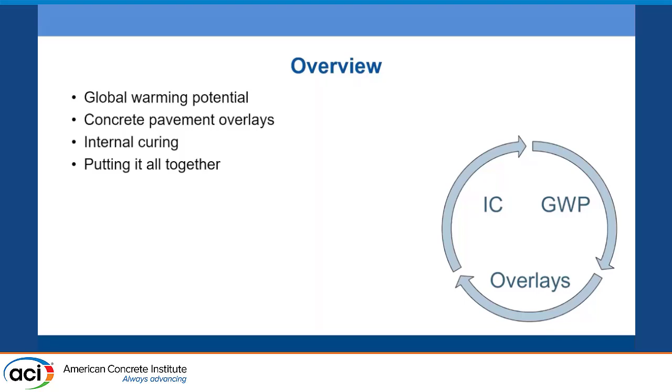With respect to global warming potential, it's been a common theme for concrete and all types of infrastructure in recent years that we're recognizing the impacts of climate change, the need to reduce future CO2 emissions, and that cement is a fairly significant contributor to those emissions. So we want to seek to reduce embodied carbon emissions of concrete, but obviously without compromising the quality or performance of the infrastructure.

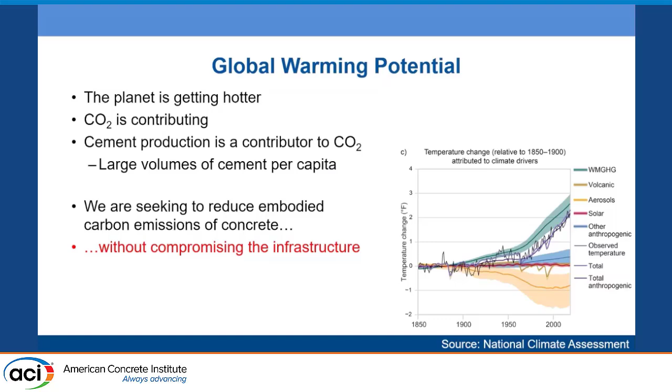In fact, designing our infrastructure to be longer lasting is a good way to reduce the life cycle emissions of our infrastructure, a common theme we've already touched on in this session. In all different sectors and types of concrete buildings, structures, and transportation infrastructure, we talk a lot about embodied carbon emissions.

In a pavements context, if we can find ways to reduce the amount of concrete we need through optimizing design, potentially use less binder in the concrete mix, or have a binder containing less Portland cement clinker, these are all good ways to reduce embodied carbon emissions.

But we do want to make sure we're thinking life cycle as well. From a maintenance and rehabilitation point of view, if we can build a pavement that requires less future work, so we don't have to use as many new raw materials to keep it in good condition over its entire service life, that can obviously be helpful.

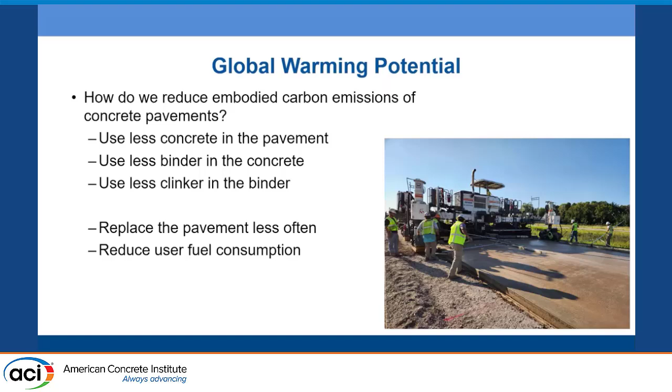One thing that's pavement specific but can be really significant is that pavements have quite a bit of influence over the fuel consumption of vehicles traveling over them. The surface characteristics of a pavement, chiefly its roughness and also the amount of deflection the pavement experiences as a traffic load travels over it, can end up having a pretty significant influence on the amount of fuel a vehicle needs to use to continue operating at its particular speed.

So beyond just thinking life cycle and reducing future maintenance costs, if we can keep our pavements in good condition for the long term, and particularly help ensure they remain smooth over the long term, that can end up having quite a bit of impact on the overall life cycle global warming potential we can measure, model, or calculate for our pavement system. So it's a pretty significant area of interest right now within the pavement community.

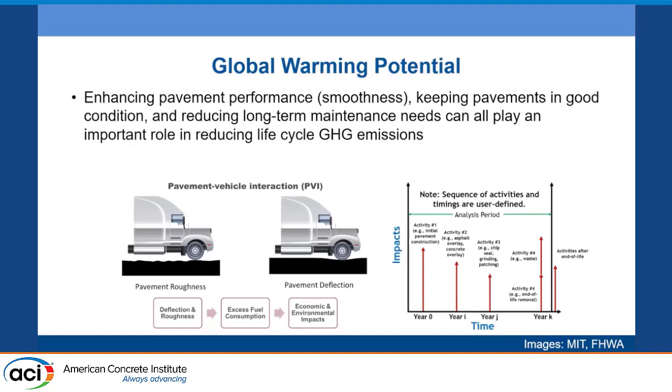To talk about concrete pavement overlays, if you're not familiar: very simply, it's a maintenance, rehabilitation, or preservation method, however you want to consider it, to extend the life of an existing pavement with an overlay of a new concrete surface. It can be applied to any type of existing pavement, whether it's an existing concrete or asphalt surface.

You can see here, in this example picture, we're overlaying an existing asphalt pavement. It's been profile milled, but then we're just coming in with a slip form paving machine without doing any other type of surface prep, and paving a new concrete overlay right on top.

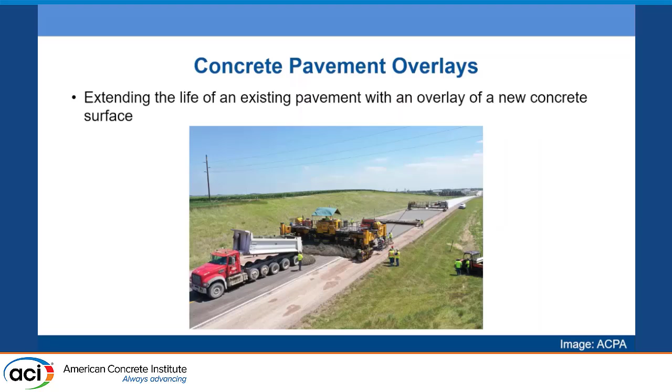Concrete overlays have the potential for a lot of long-term benefits, both in terms of life cycle cost, as well as life cycle carbon emissions. We have the ability to upgrade an existing distressed pavement, putting it into better condition, better able to allow traffic loads to travel over it without experiencing as much roughness or deflection. We're able to use equity and resources invested in the original pavement.

Generally, concrete overlays are not as thick as a conventional pavement because they do have some underlying pavement structure that they're able to rely on for load carrying capacity. Compared to new construction, it reduces the amount of time and energy needed for the construction process. And because they're not as thick as conventional pavements, we're using less raw materials.

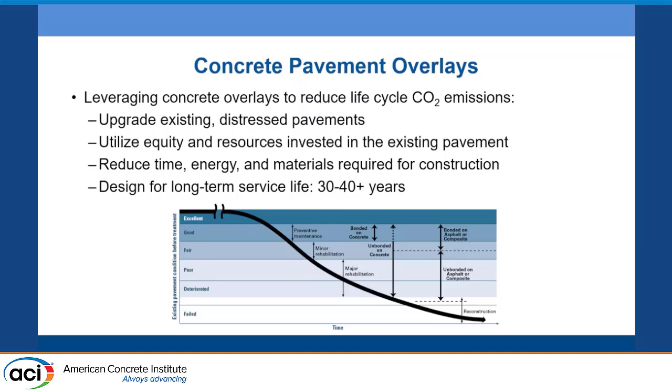If you compare concrete overlays to other types of pavement rehabilitation, whether very thin surface treatments or conventional thickness asphalt overlays, one additional benefit is that concrete overlays can be designed to achieve very long-term service life, on the order of 30 or 40 years. Being able to build something once and keep it in good condition could have long-term benefits from an environmental point of view relative to other pavement rehabilitation techniques.

And now we get to curing. Our typical conventional curing process for concrete pavements is to use a white pigmented curing compound that we apply to the surface and the sides of the slab. Just like bridge decks, concrete pavements are exposed to the elements. It's a very harsh environment.

We're going to be placing de-icing chemicals on the concrete pavement. So anything we can do to keep as much water in the system during hydration to promote good curing, and in particular to make sure the surface doesn't dry out and we don't end up with a weak surface susceptible to scaling or future joint deterioration issues, is important. Curing is a really critical part of the construction process for concrete pavements, and it's critical to getting the longevity and durability we're looking for.

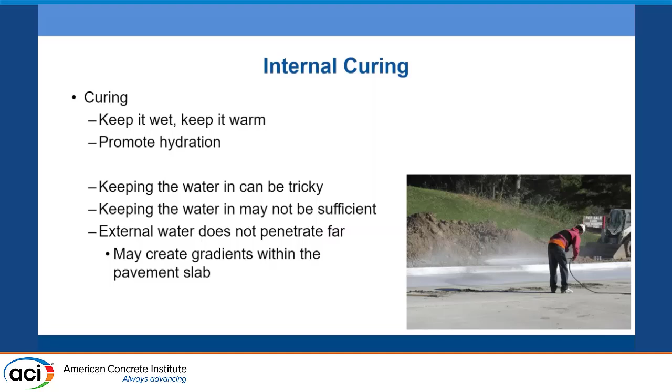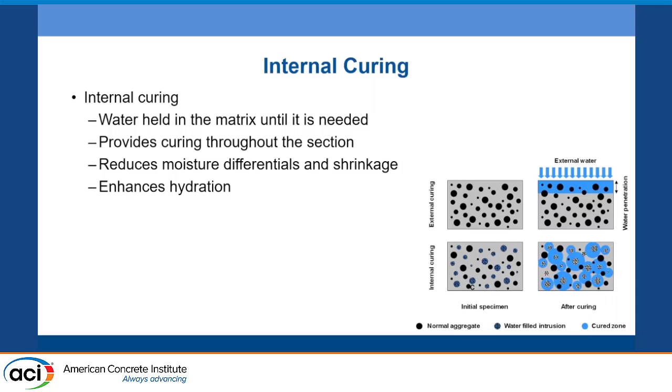Internal curing can obviously have a lot of benefits to all types of concrete structures, as we've been talking about this morning. But some key things we're interested in from a pavement's point of view, in addition to enhanced hydration and enhanced properties, are the ability to reduce the moisture differentials that develop as concrete is setting, and to reduce shrinkage. Those could have a number of different benefits for concrete pavements.

Particularly when we look at concrete overlays, these are thinner than conventional full-depth concrete pavement slabs, usually on the order of a couple of inches, the way most projects are designed and built—at least I can speak to the Midwest. So we have a situation where more surface area of our concrete slab is exposed relative to the volume of concrete in the overlay system, compared to a thicker pavement. So curing is even more critical to ensure good performance out of our concrete overlays.

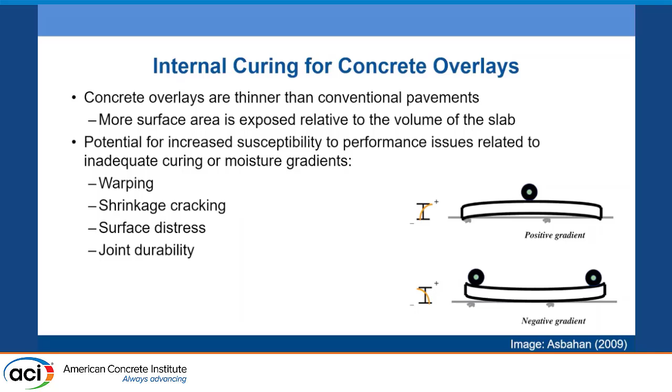Warping can also induce additional stresses and potentially reduce the fatigue life of the slab if there's a significant amount of warping. The temperature gradient plays a role in this as well, and sometimes they're lumped together—you'll see curling and warping used interchangeably. But the moisture gradient plays a significant role in that process, in addition to the potential for shrinkage cracking, especially in dry conditions if the pavement isn't well cured, and susceptibility to other surface distress and joint deterioration related issues.

Looking at the set of things we're particularly concerned with regarding curing, that's where internal curing jumps out as being useful—not just for pavements in general, but particularly for concrete overlays, where because of the thinner nature of this pavement system, it might play a larger role or give us a greater benefit, reducing the probability of having these potential problems.

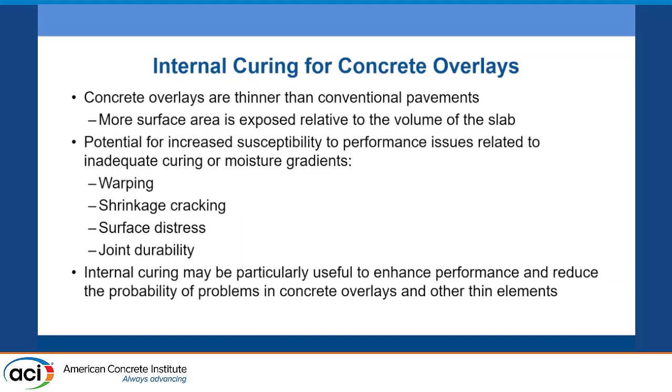Jumping now to the project that was built, this was on a county highway in Washington County, Iowa. This was a 6-inch thick concrete overlay. The terminology you see there, COCU, that's concrete on concrete unbonded overlay. So the existing pavement was a concrete pavement. You can actually see here, though, they're paving on asphalt because they're using an asphalt separation layer to relieve stresses, preventing reflective cracking from the joints in the underlying concrete pavement into the overlay.

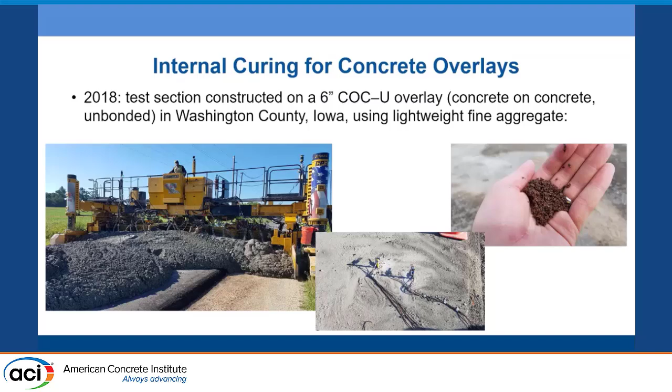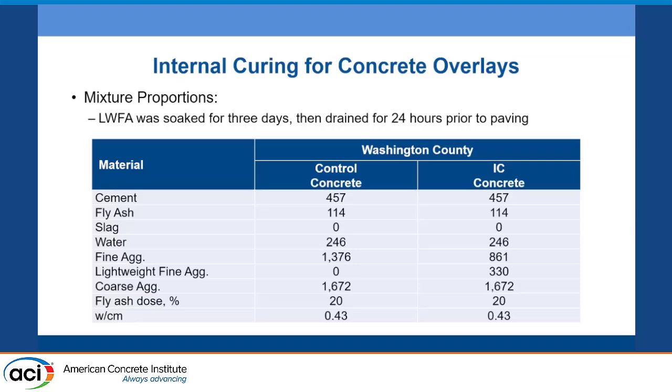So just some notes from the construction. Everything went very smoothly out on the grade. The test section here, it wasn't the entire project that was paved this way - it was a test section that was, I think, about 500 feet long. So you have a lot of control, and we were able to instrument the control section alongside this internally cured section. The contractor set up a central batch plant for this project, so they were running their own plant. They didn't note any issues soaking or draining the stockpile of the lightweight fine aggregate. It was soaked for 3 days and then drained for 24 hours prior to construction. Obviously the quantities, since they were only paving for 500 feet, were fairly limited, but they didn't perceive any major logistical issues with that.

The lightweight fine aggregate was batched assuming saturated surface dry. Overall, all the operations at the plant went well. Out on the grade, the finishing crew didn't really observe any differences between the control mix and the internally cured mix. They did notice, actually, that the mix maybe looked a little bit wet, and maybe some cream was vibrating to the top of the concrete in the grout box right in front of the paving machine. But they also observed that on the same day when they paved the control section, so it may have just been particularly how they had the mix dialed in on that particular day of paving.

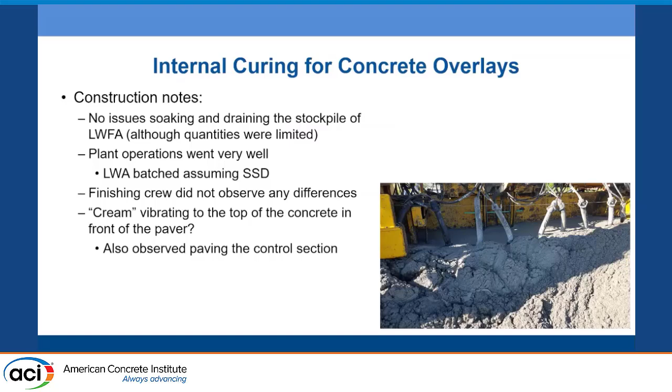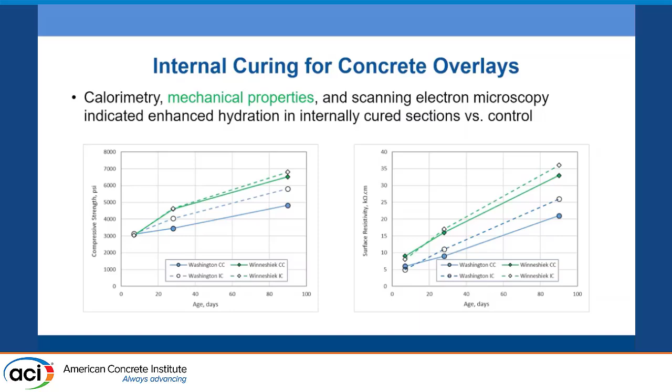Same story, the plot on the right there is surface resistivity, so testing cylinders to infer permeability and long-term durability. Again, the internal curing sections were able to achieve greater surface resistivity values. And then finally they did take some samples, look at them under the scanning electron microscope, and noticed that it appeared there were fewer unreacted cement particles remaining. They did tests at 7 days, 28 days, and 90 days, and at each step in the process it looks like the sections with the lightweight fine aggregate were all able to achieve greater amounts of hydration than sections without.

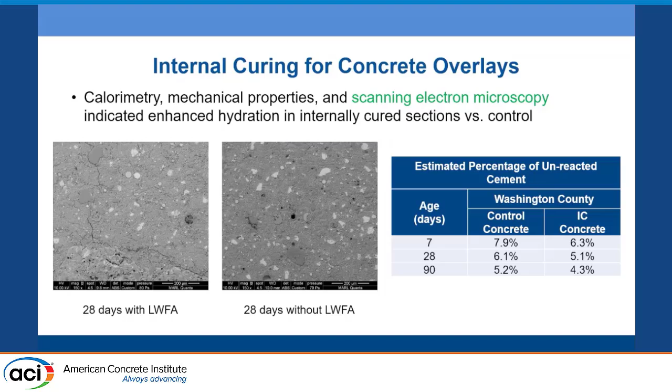So in general, a lot of these benefits or properties of using lightweight fine aggregate that we've seen cited, we've seen evidence of in these sections here when we look at them compared to the control. And then finally, the last one that's pretty interesting here - the team did LiDAR testing to look at the shape of these concrete slabs out in the field for about a year after they were initially constructed. What they found was that the internal curing test section appeared to demonstrate a reduced moisture gradient, both initially after construction and when they visited in spring, summer, fall, and winter over the following year.

The gradients they measured through instrumenting the slab appeared to be less in the internal curing test sections. And with the LiDAR measurements, they also noticed that did in fact correspond to less overall shape change in the slab. It appeared to have not as much of a built-in curling or warping profile, and it didn't experience as much movement between measurements taken at different times of year and day, relative to the control section.

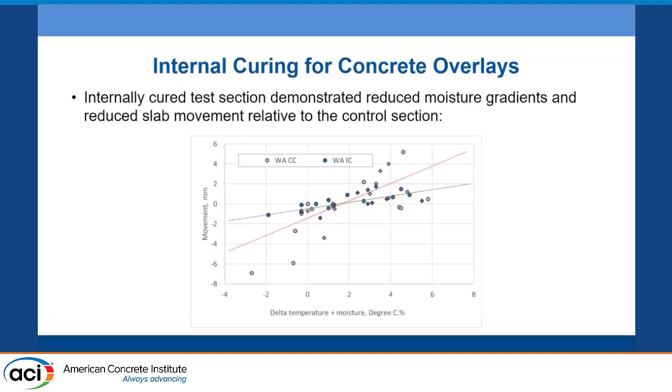This is interesting to look at because most pavements have a built-in gradient that's a curled up shape. Looking at these projects, reviewing the report and the measurements taken at different times of year, it appears the control section actually had a built-in curled down shape, mostly curled down, which is interesting. We've seen projects like this before, it's just not the typical behavior for concrete pavement slabs. But again, the internal curing did not have as much of a gradient as the control section, so it generally had a flatter profile, and you would expect in the future that it would also be a smoother pavement.

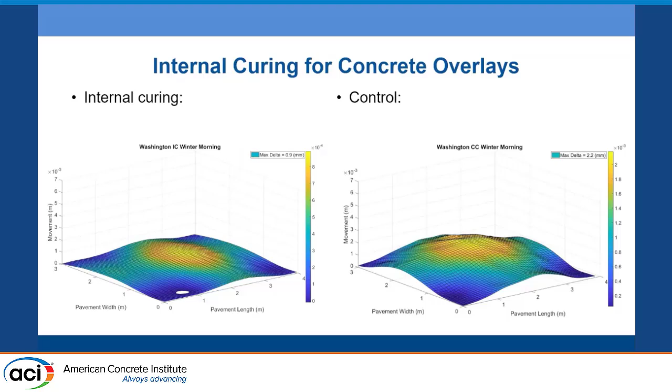That's where we can start connecting the benefits of internal curing to global warming potential. So putting everything together, if we're able to realize benefits of internal curing such as reduced warping, which can reduce the stresses experienced in the pavement slab under traffic and increase smoothness, that can have a number of benefits to the overall life cycle emissions associated with the pavement. Longer lasting, more durable, less future maintenance, but also reducing fuel usage during the use stage of the life cycle assessment from vehicles traveling on the pavement, because we have a smoother surface and don't have to expend as much energy to travel over it.

Some of the other things we're hoping to design for durability could also involve using less binder in the concrete, and that plays in pretty well with the benefits of internal curing. Some of the other things we're looking to achieve with concrete overlays, if we're able to reduce warping, maybe that allows us to optimize our concrete overlay designs to some extent, and maybe that would allow us to potentially reduce the thickness of our overlay design. The other benefits we're looking to achieve with concrete overlays in the first place can certainly help play into global warming potential.

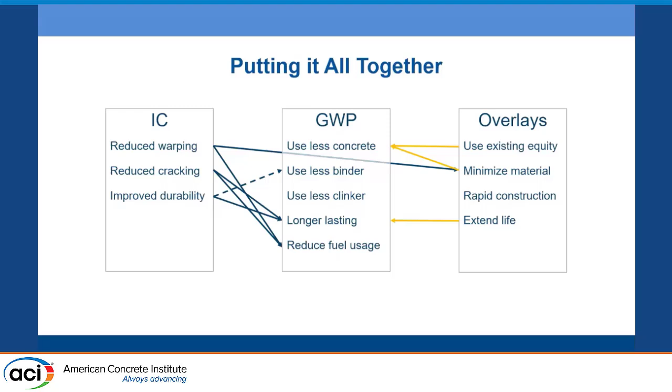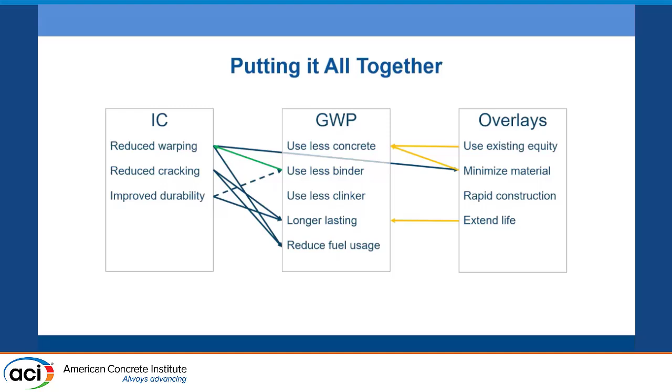Relative to new construction or a thicker, full-depth conventional concrete pavement slab, we don't have to use as much material in our concrete overlays. Looking very long-term, or going back to the original construction, we're utilizing the existing equity and trying to keep an existing roadway that's already been constructed in good condition, improving its current condition. Anything you do to extend life and help ensure a longer-lasting pavement is good over the life cycle. There are a lot of different design goals we're looking to achieve, sometimes for different reasons, and they can end up coming together and working well in these types of contexts.

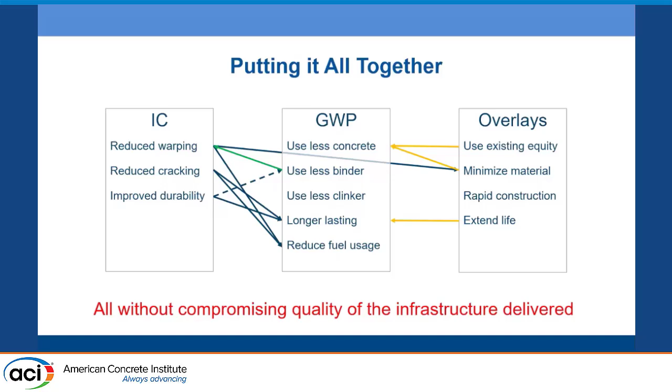A critical part about this is we're not just taking something out of the pavement when we do this, or compromising performance. We're able to achieve these objectives while hopefully enhancing performance. I think we've seen, based on the test sections built in Washington several years ago, quite a bit of evidence that we were able to enhance the performance of those concrete overlay sections.

So in conclusion, internal curing does appear to be a good sustainable solution, not just for buildings and bridge decks, but also for our concrete pavement infrastructure. Overlays do appear to be a particularly good use case, given it's a thinner pavement element, it might be more susceptible to curing related issues, and so internal curing could be particularly helpful there. Again, it supports reduction in carbon emissions while also improving the quality of the system.